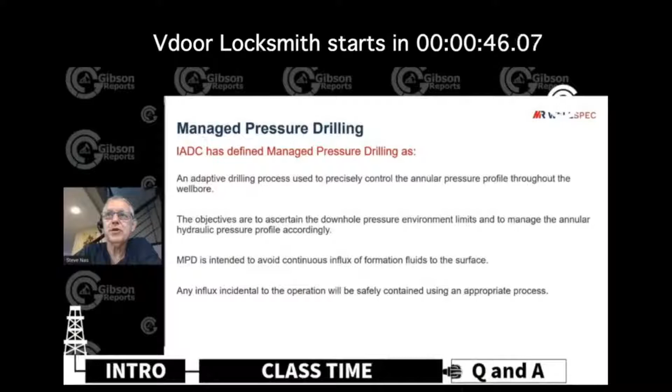So managed pressure drilling has been defined as a process to precisely control the pressure profile in the wellbore.

The key is being transparent with our clients in this case. So tell them what happened. If we had a failure, tell them exactly what happened, whether it's our fault or whatever the issue was, we need to be transparent. It's very important for everyone in the industry to know what's out there and what's happening downhole as well.

I've probably worked on over 40 different performance limiters in my career. If I miss any of those and the computer is raising weight on bit and I miss any of those, I have a train wreck. The computer's going in the ocean.

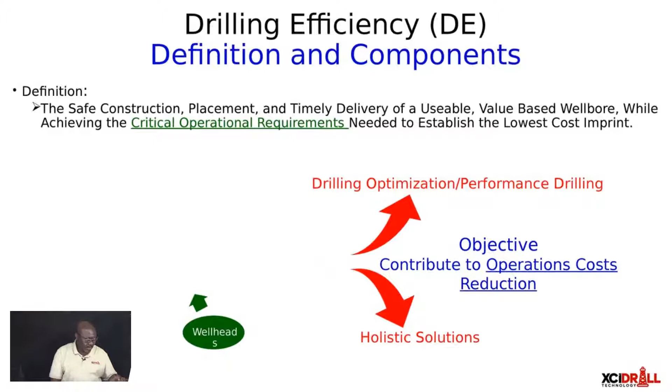So what is drilling optimization? There are several definitions. I really do not want to try to define what it is as seen by the industry today. There's no alignment, it means different things to different people, subjective opinions in conversations.

Pause real quick. Okay, I'm paused.

Okay, go ahead, we're good. Okay.

Some of the slides don't show the whole thing, they show missing parts. I don't know if the viewership sees everything. So in that regard, I'll get into it: there are several definitions, like I said earlier, and there's no consensus.

All subjective. But the key KPI is on ROP maximization, and also sometimes we talk about it as MSE minimization. But the question I would ask is this: ROP maximization and MSE minimization are the same thing, but we tend to talk about them like they are two different objectives for the project, when they are the same.

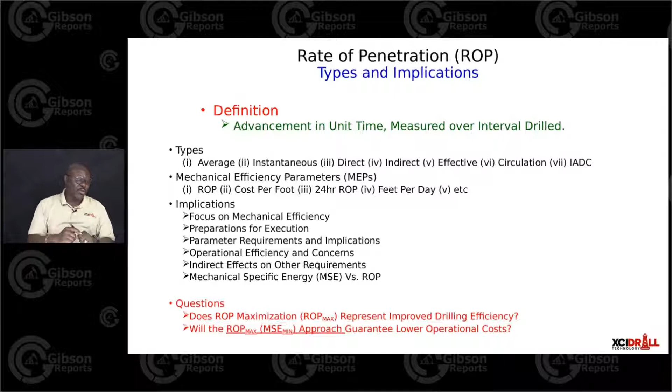So the question we need to ask ourselves: what is the intent of this effort? It's to reduce our operational cost. Therefore, does ROP maximization lead or guarantee a reduction in cost? That is the question that, regardless of how we execute, we need to answer at the end of the day.

You come to the other side of it, which is what I'm going to be talking about based on my time with Chris Special, which is the holistic solutions. And here we're defining that as a process for cycle time improvement, i.e. reduction and consistency, based on some execution principles and concerns, but based on the analysis of relevant data through a holistic or complete evaluation of the drilling process.

Now, there are some key terms that come up as well. And so what we need to realize is the key terms being that it's a process, it's talking about efficiency and reliability, it gets into applications assessment, and then holistic evaluations or complete evaluations, and then at the end is the analysis of relevant data.

So these elements come into this new definition that we are proposing, compared to what we do today as drilling optimization.

Now, if we are going to talk about cycle time improvement based on our execution of the holistic solutions approach, we cannot leave that in a vacuum. We have to define what a cycle time is. That cycle time is the cumulative time involved in the following phases: pick up the BHA, drill out, drill ahead, trip out, run the casing, and any trips you may have to do based on what happens in the drilling. So we add all that time, and that is our cycle time as we are defining it now for the holistic approach to improvement.

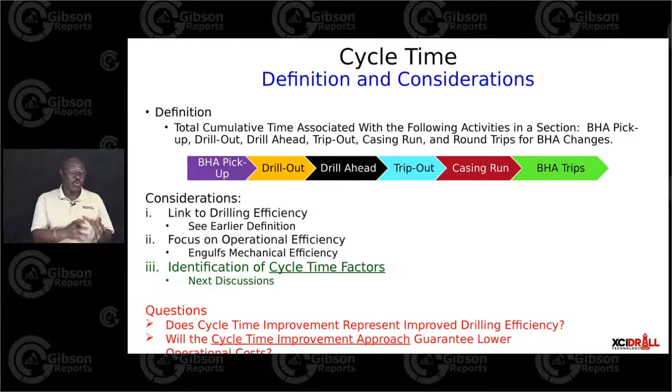And if that is the case, let's now look at it and show that we get that intent from that definition. We talked about holistic solutions, cycle time improvement, and the achievement of specific operational requirements when we defined drilling efficiency. Those requirements have to now be defined, so in talking to you we all know what we are talking about. The diagram you see is the cycle time factors, the operational considerations that must be achieved to reduce my cycle time.

Now, as you see, these elements are all known in the industry. We deal with them every day, but it's how we treat them and how we assess them. So basically, what we are saying today is that these elements we've always known are all related, and we cannot discuss them in isolation. I can't come to you and say, well, I'm doing well because I'm drilling fast, or because I'm drilling long, or because my torque is low or my vibrations are low.

No, those conversations in isolation we can't tolerate if we want to move ahead. We need to sit down and say, these are the elements. How do they affect my performance? Which ones are more critical? And how do I design my system and execute to achieve them?

The process of saying, let me go improve ROP, and if I get ROP improvement, then I'm going to go fix a new limiter or something to drill longer, that is way too old as a process, and it takes too much time. If we sit down and assess that system, we move faster because, as you can see, they're all related.

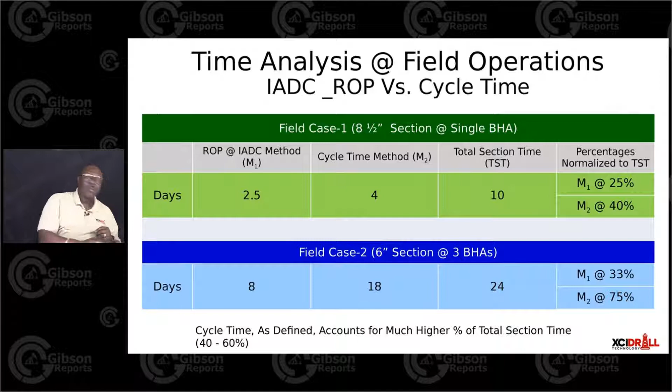I think I'm trying to move forward. There's no moving ahead. Which slide do you need to be on? The next one, 10? Yeah, there.

Then the next time, as they go through the second phase, also the same thing, then there's a need to improve. And then the conversation comes up: do we do the ROP maximization approach or will we do the cycle time approach? As a new process of learning, let's all learn to grow.

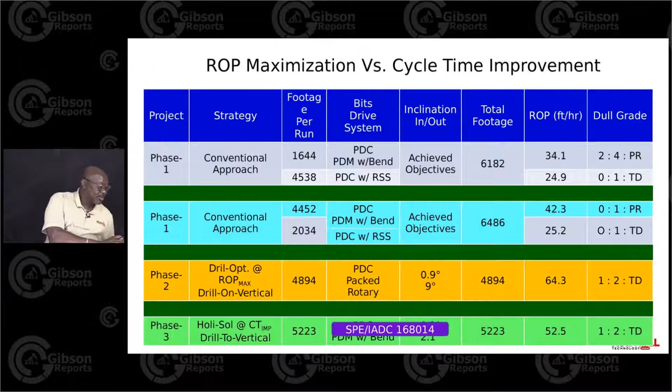Now here I'm just summarizing what it used to be. Remember the earlier diagram I showed of the elements that are all interrelated and linked, and that ROP was one of them?

And then the conditions we had were: one, the need to have a specialized bit to help us drill vertical in an area that was very difficult to hold verticality. Two, the BHA design: instead of the packed to push more weight to drill faster, we went to a pendulum, which we knew had to be run with less weight to stay vertical, to help us drill to vertical, because the pendulum allows you to make corrections through rotating events as against pushing hard on the packed.

That change, together with realizing that the bend size we use has a big effect on the durability and our vibrations as well, meant that if we want to do that and go pendulum, we also have to manage our bend size to make sure we can drill. The risk and RPM limitations based on the bend also came into the analysis.

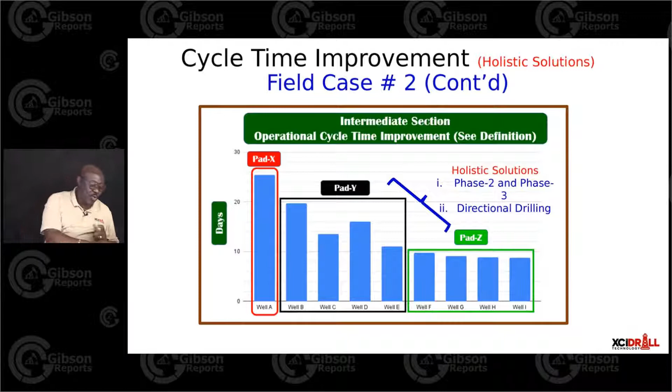I'm not in any way saying or claiming ROP is not important. Far from that. If a project requires me to increase ROP, knowing what effect that has on all the other things that need to be done or achieved, then we go for it. But I can't start a project with the intent to maximize the ROP without knowing how it relates to the other things that you saw in the earlier diagram. That should not be how we drive our performance and cost reduction.

And we know something else. Vibrations is an interpreted output. So we measure certain things around the parameters and we decide that, oh, we are vibrating and this is the mode of vibration back and forth. But because it's an interpretation, you will see that the same project, when we come to the vibration conversation, the modes could be defined or identified differently based on the tools you are using and which service company you're working with in their processes. So that is not an easier thing to do that quickly.

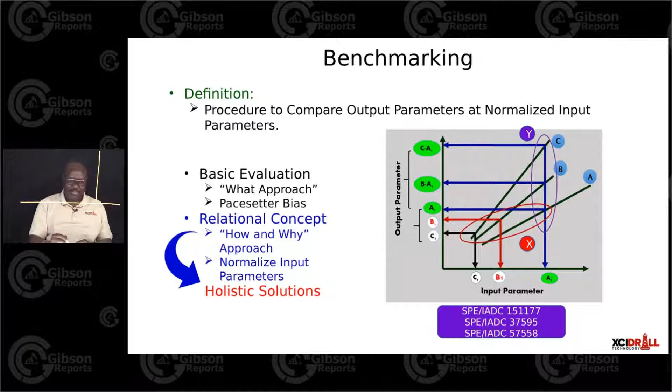Now, let's do something.

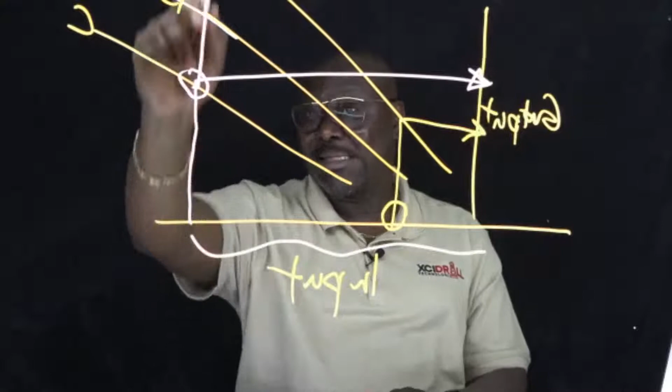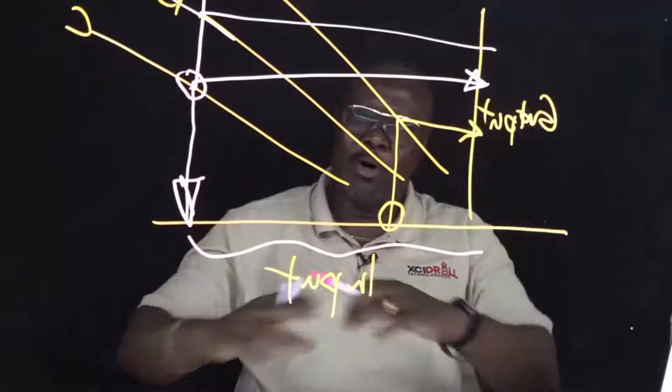What happens if I compare A, B, and C normalized conditions based on what C got? I come back and extend it to A and B. So if I give C $1,000 to go shopping, I better give B $1,000 to go shopping too. If I give you $1,000 and I give him $50, and he brought me one shoe while C brought me 10 shoes, I can't say C is the better shopper because he knows how to bargain at the store. No, it's because I gave him more money.

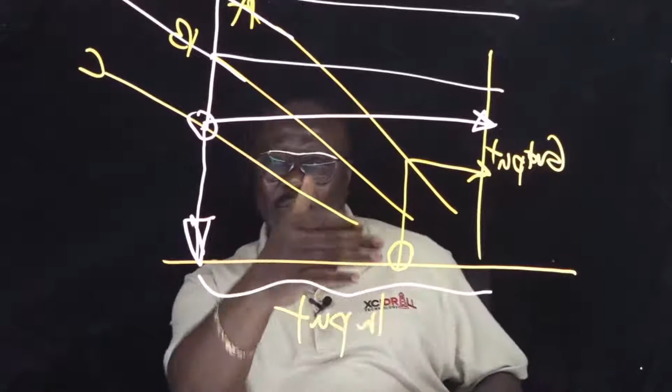Now I'm going to say something else. There are people who, when they begin using certain equations or processes, will tell you that when you want to use MSE to do your efficiency measurement, the first part of MSE, which is the weight over the area of the borehole, you should neglect because it's so small compared to the whole MSE output.

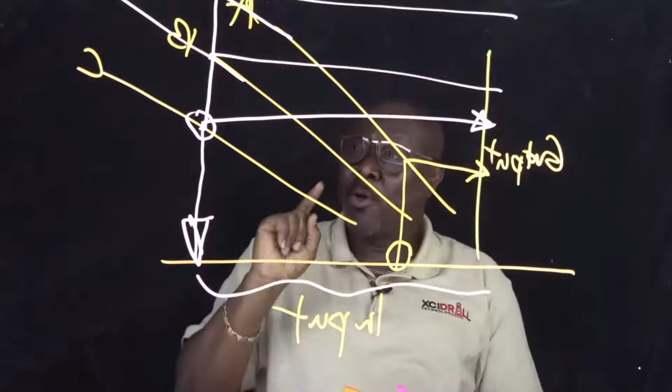Wait a minute. You're telling me to drive to Dallas. You give me a very big car that needs 80 gallons to get there, but you don't want to know how much gas I put in the car or how much money I'm giving you, yet you're going to judge me when I get to Dallas? That's not how it works. You have to look at every parameter that is in the drilling process.

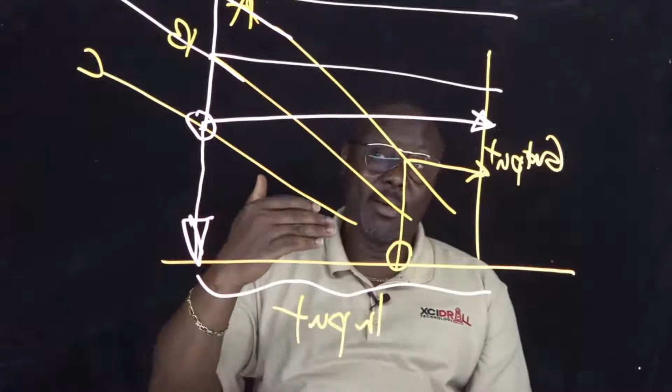That is why I started with input and parameters. You cannot neglect weight on bit, when weight on bit is what drives torque and ROP. You can't measure ROP and evaluate how good it is without needing to evaluate what drove the ROP. That process cannot be how we manage, benchmark, and evaluate. We have to look at them at the same input conditions.

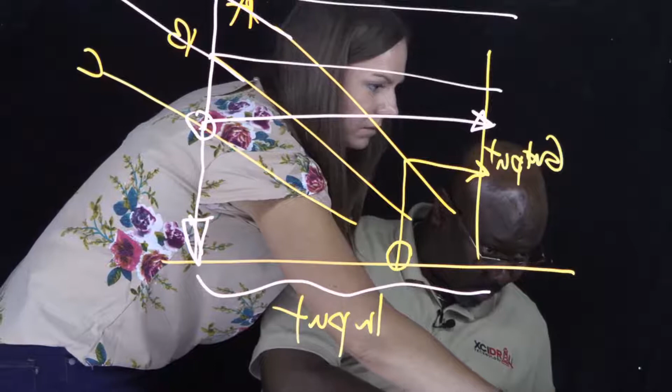All right, so now that we've shown how benchmarking has to be done by analyzing output parameters at normalized input conditions, let's look at certain conversations that I think are very critical before we move to the field requirements in performance.

In the planning stage, as per the new holistic process I'm talking about, looking at cycle time and the factors I listed earlier, we need to have a very good conversation on formation drillability, hole size, the physical versus functional aspects of what we do, and understand the similarities, differences, or relationships between failure, durability, and longevity.

Then we come to rock mechanics itself. There are so many elements that need to be understood, but for time, I'm going to pick on a few of them just to help establish what I'm talking about on the holistic side of the conversation.

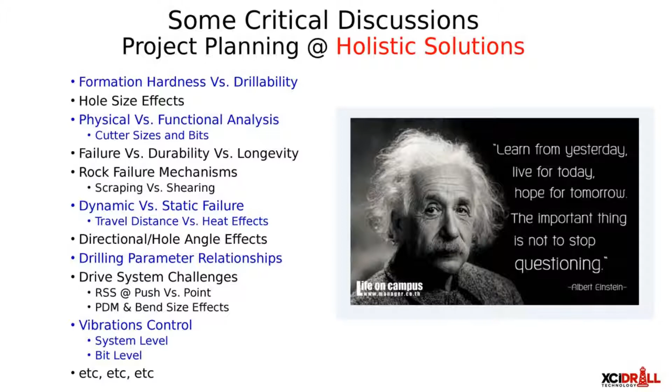Now let's look at the formation drillability aspects. We've been made to believe that the harder the rock, the slower you will drill, the more BHAs you will run, the lower your ROP, and so on. And that if the rock is softer in terms of strength, whether UCS or CCS, you should be drilling faster or longer. So you sit back and ask: when you compare the field observations to the claims and theories around this conversation, does it hold?

My experience says no. When I look at the rock effect, I come to a position I call formation drillability and its contribution to drilling difficulty. Drilling difficulty exposes how likely I am to succeed in my operation. In that context, if I have two sections of the same lithology, and one of them has hardness from 0 to 40,000 psi, and the other looks like this...

On average, we know it is lower than this one. This one here, A, is much more difficult to drill, more likely to cause failures, challenging with directional work and everything else compared to this one, B. But this realization then exposes us to a different conversation: that hardness is not as critical as the heterogeneity and how that contributes to the dynamic events around the drilling.

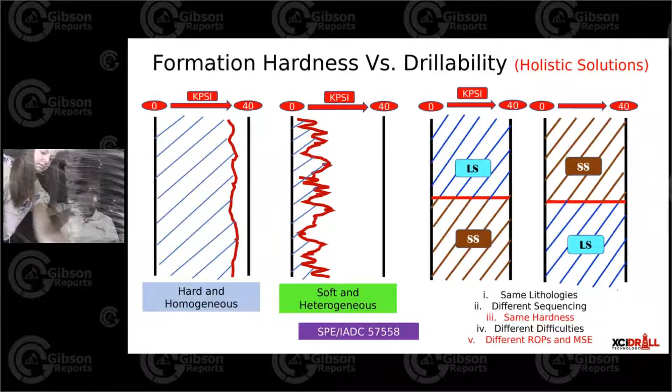Okay, so if I'm going to do something now. If I have two intervals to drill, and I have the same average hardness for the interval, same length H and same length H, and I have two lithologies, limestone and sandstone. So I have limestone here and sandstone there, same hardness, and now I have sandstone and limestone, same hardness, but the sequencing of the lithologies is different, though it's the same hardness. Let's say this one's hardness for the section is 30,000 psi, and this one here is also 30,000 for the two of them.

Our current position around drilling optimization today, and the claims we make about the difficulty of the drilling based on our hardness, pertains to what we say is 100% drilling efficiency -- what that rock strength should be when compared to our MSE, for example. Okay, these two should drill the same. The MSE should be the same if my bit and BHA is the same for the two of them. But you will see in the field that that's not the case.

When I have a section where the formation drillability of two different lithologies is the same, but their sequencing is different, I can do the same comparison for shale-limestone, limestone-shale, or combine them in any way. I just told you two for simplicity. The section where I drill limestone first and sandstone second, when the hardness is similar to the second option, drills better than when I have sandstone on top and limestone below -- not even close. Now, if the hardness is the same, but because of the sequencing in the lithology my ROP for the section will be different, then my MSE will also be different.

And if MSE is supposed to be equal at 100% efficiency to my rock strength, and the rock strength is the same, then the MSE should have been the same. But it is not. So how then do we relate the claim of 100% efficiency in value of my rock strength to the MSE? I'll leave that for another day's conversation, because David is going to tell me I'm running out of time here.

Where's my next slide? David, next slide.

So on the next conversation, after having talked about the importance of formation drillability in the holistic approach -- because in the holistic approach, I'm not looking at the hardness, I'm looking at the drillability and the difficulty of the section to make sure my system design, BHA, everything else comes into play for me to be more successful --

Now I'm going to talk about something else. In the past, especially when I used to look like Michael Jackson with an afro, we were told and learned that if I have two bits with two different cutter sizes, the bigger cutter compared to the smaller one gives better ROP. That's true. We are designing these bits now, and also, the fact that what we do to the bodies of the bits -- that claim is not true anymore.

So if I have two cutters of different sizes, there are conversations. If I do laboratory testing to verify the impact resistance of these two cutters in the lab, the bigger cutter needs more joules or more energy to fail than the smaller one. But if I took two bits to the field -- say a 6-bladed bit with 16mm cutters, and then a 6-bladed bit with 19mm cutters --

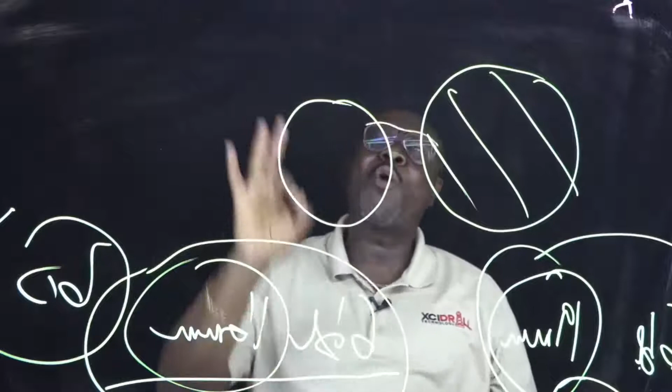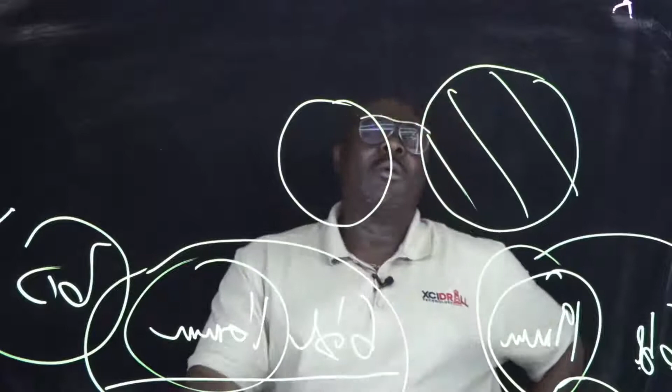Now, some people also will argue that a 19mm cutter was going to vibrate because it's 19mm. No, cutters don't vibrate because of the size of the cutter. The bits don't vibrate. It's not the size of the cutter that is making you vibrate. It is the design of the bit with that cutter that is making you vibrate.

So again, the observation is there. If I run this bit and then I run that bit in the field, my torque is higher here than here. Now, we tend to associate higher torque with vibrations. Vibration is more dependent on the behavior of the torque, not on the magnitude. So, but then I'm not going to claim that if it's higher in magnitude, the susceptibility to vibration is not there. It is there, but it is within my means to control.

If I understand the design, and I'm going to touch on that very briefly because David is already waving, but look at this slide. Okay, let's go back to this slide. I'm showing you 3 comparisons of bits.

This here, the one you see bottom left, it's a 7-bladed bit, 16mm cutters, against a 9-bladed bit with 16mm cutters. The 9-bladed bit with 16mm cutters is faster, is more durable, and drilled longer than the one with 7 blades. So all the things that at least we will say we can accept, that physically the 7 will be faster, but the 9 will be slower.

That is not true. Now you go to the one on the top. I have an 8-bladed bit with a 6-bladed bit. And again, the same conversation: the one on the left, which is 8, faster, more stable, more durable. Then you come to the one on the bottom, and that's where it really gets exciting.

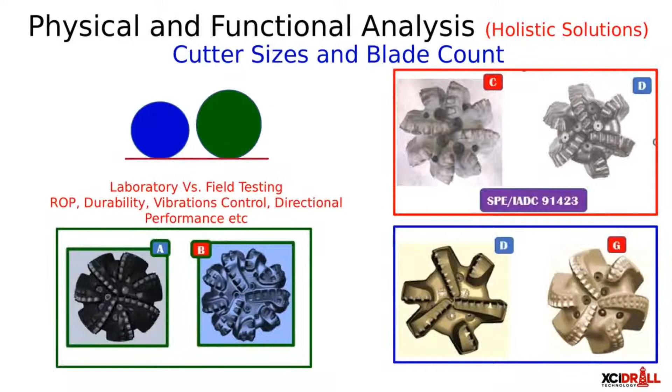Okay, so let me now, what's the next slide? Okay, go back. Okay, now I'm going to get into a subject here.

I'm referencing the paper from which this comes. Three bits were tested in the lab. The first bit has 8 blades with 13 millimeter cutters and lower back rake. The second has 9 blades with 13 and 16 millimeter cutters, 13 and 9 millimeter cutters. The third has 8 blades with 13, 9, and 11 millimeter cutters.

Now, the bit with bigger cutters all average throughout, which is the X bit, is the slowest. So a bit with bigger cutters throughout and lower back rake in the lab is slower than the two that have smaller cutters and more blades.

So conversations around this don't hold anymore, because we are doing so many exotic things to these products that those claims don't hold. But why is this diagram important? As you look at the 3 bits and the ROP response to weight, by the way, RPM is constant in these evaluations.

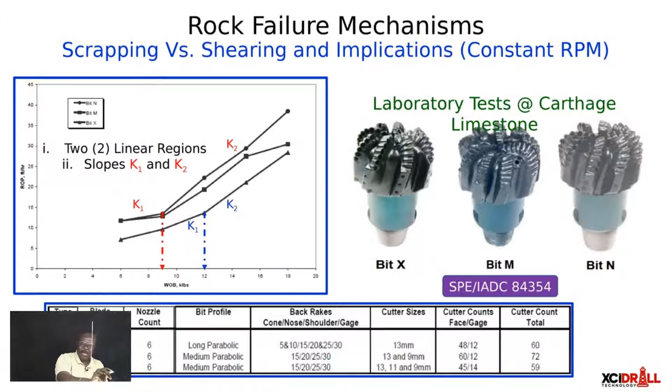So is the nozzle count, the TFA, and the flow rate. All those things are kept constant. The only difference is the weight, and we're measuring the ROP. Now, if you look at those diagrams very carefully, those lines very carefully, you see lines that look like this.

That line that looks like that defines the two rock failure mechanisms of the bit. And it's very critical for our ensuing conversations for us to know what I'm going to be touching on here.

So if RPM is constant, so is flow rate, TFA, everything is constant, and I have my weight on bit here, and I'm measuring ROP here. As I do a drill-off test or apply parameters, I see an ROP increase anytime the weight on bit goes up. It gets to a point where the same finite increase in weight on bit gives me a non-proportional or exaggerated increase in ROP.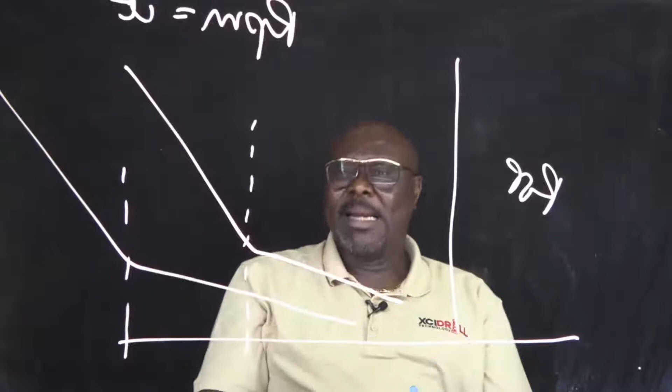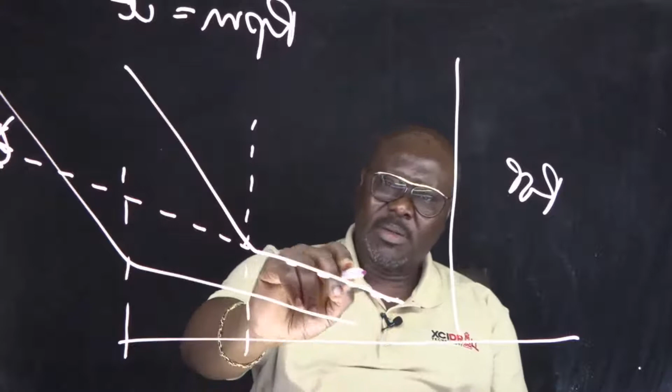That depth, or that value of weight, at which I see the deviation from my trend, because normally the trend starting from here should have gone like that, but it doesn't. It's a no-no, it changes there. So I will characterize this condition as scraping of the formation, and then shearing of the formation.

These two conditions are so critical and needed for us to understand as we move forward, especially in the field. So anytime you see this, I'm going to show a different diagram where I differentiate that. What am I seeing here? If this was bit X and this is bit Y, bit X is taking much more weight, WX, to transition from scraping to shearing.

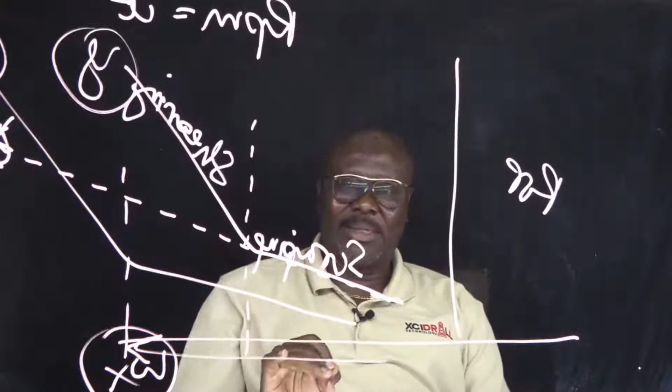So what is the difference between the two, and why is that important? Why do I care about this transition? I care because the heat the cutters see on the bit changes based on that transition. If I stay in this zone longer, it doesn't matter how many cutters or blades I have on the bit, I'll build up more heat and wear it faster.

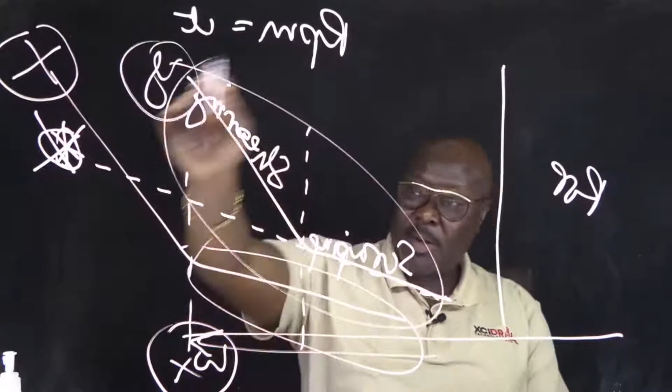If I transition to shear quicker, like this one is doing, let's say I'm running these two bits at this weight here, and this weight here. This one is giving me this ROP, and this one is giving me this ROP here.

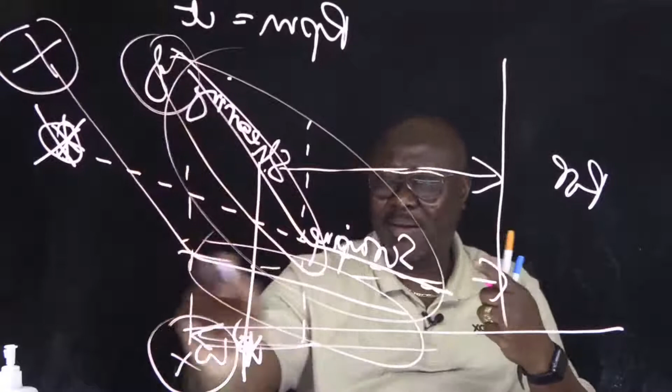The significance of the mechanism of failure is much more important than the ROP, because in addition to this ROP being higher, it is building up much less heat in the bit, and therefore less likely to start to wear compared to this one, which is drilling slower and wearing, and also building up heat.

What does this mean? Sometimes in optimization we'll pull a bit, and the bit is worn, maybe 2, 3, 2, 4, whatever it is, and we say, oh, let's go get a more durable bit. What does that mean? A more durable bit means finding one with smaller cutters and more blades, increasing the number of cutters. What have we just done? We've just forced the bit that was scraping to now guarantee it's going to be scraping more and longer.

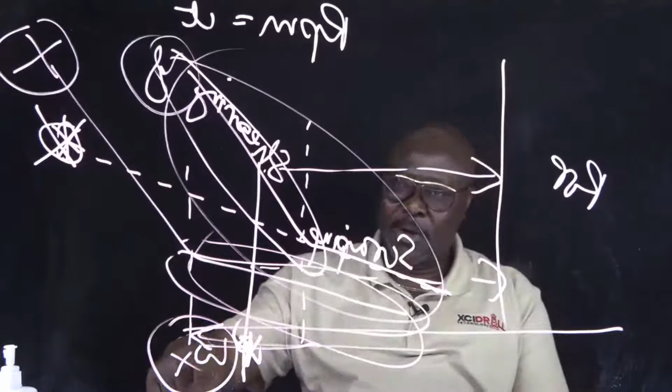It's like going to the kitchen and finding out the knife you're using to cut your tomatoes is blunt, you cannot cut. And you say, wait a minute, let me put more force to cut a tomato, but in doing that, let me get a blunter knife. That's what we're doing. In the holistic approach to solutions, we don't do it like that. So with this conversation, let me now transition to a more critical implication. David, give me the next slide.

Now, this slide here, okay, all right. Okay. Okay, so I have yeah. Okay. Oh, I like this color.

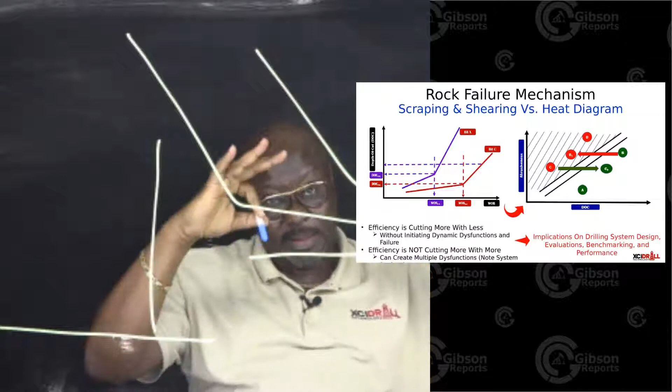So if RPM is constant, and my flow rate and everything else is constant, then I can equate my ROP to my depth of cut, if RPM, flow rate and HSI are all constant. Otherwise, the two of them are so different in how we should understand and interpret them. But because I kept that constant, I'm going to make that conversion in the discussion.

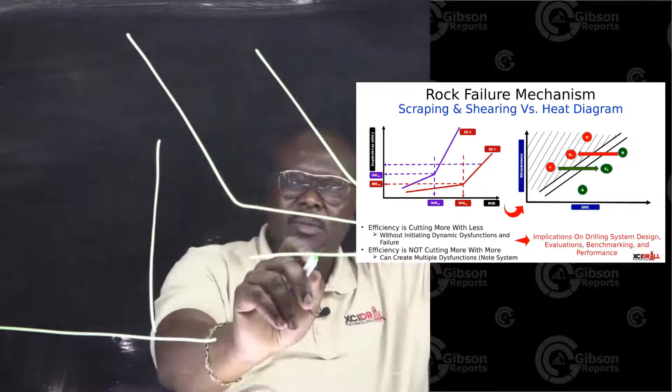So the ROP I was getting, based on these conditions here, I'm now going to bring into my heat diagram. We know that heat we build in a bit is a function of the friction we create whilst drilling, which is also dependent on my depth of cut, which now I'm going to be equating to friction from the rock, the abrasiveness of the rock, then my depth of cut, which I'm going to be equating to my ROP because my RPM is the same, and then the time I stay in the hole.

That's what I'm building up on the heat. And I can add other things like RPM and all that stuff, but those drivers contribute, they don't dictate as much as these three elements I've talked about here.

Now, there's a paper written by Allen Sinor. Allen Sinor wrote a Bible to me, SPE 39306. This conversation that I'm having, especially here, Allen Sinor described all this years back, about 25 years ago. And the concepts have not changed. We have just neglected his teachings.

So let's go back to my heat diagram. Now, I'm going to plot, look at this line here. Okay, so anytime... David, can you go on the screen? Make it bigger for me?

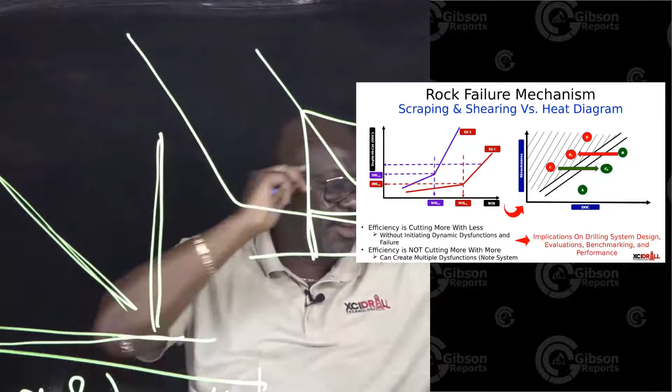Yeah, okay, so anytime we are on this part of the diagram, anytime we are here, we are going to wear the bit. Anytime we are here, we don't wear the bit, we don't build heat. This is a heat diagram. So we want - and we have abrasiveness on this side and my depth of cut on this side.

Okay, so we want to stay here. We want to stay in this, we want to stay here. Now, what I'm saying has been tested and proven in the lab over and over and in the field. It's not anything new, it's just the application of these principles through the physics to the field. But it's been proven. I want to stay here, I want to stay here, and I don't want to be here.

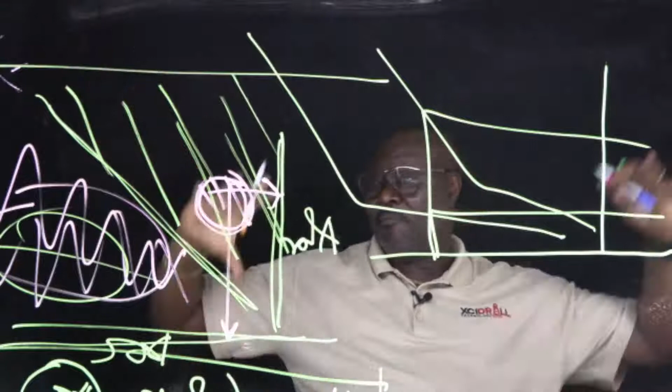What does that mean? If I want to minimize my wear, let's say I have a bit here that is wearing because of the abrasiveness of the rock and my depth of cut, which is low, I'm in this region, I'm going to wear. So it doesn't matter - if you want to improve your ROP, sustain it longer and drill longer, you don't put a very heavy set, with tons and tons like a tank, because then you are going to reduce your depth of cut, and if the rock gives you any abrasiveness, you are going to entertain the wear.

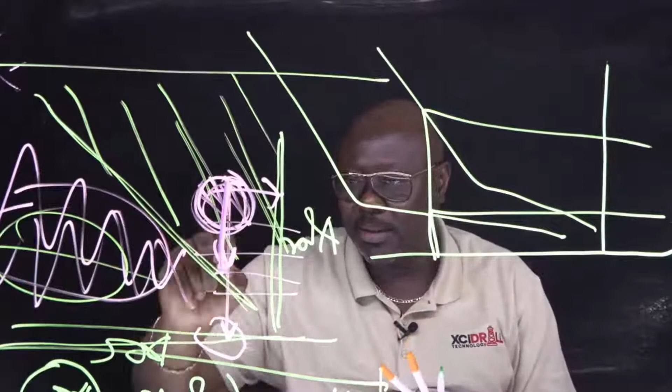And as we know, wear begets wear. As you start to wear, the minimal wear grows into bigger wear, and very fast. So if I am here and I want to improve durability and drill longer, faster, I cannot change the rock, which means I cannot come down in this conversation. I cannot come down here because the rock is the rock. The Travis Peak, the Plover, the Huamampampa does not change.

But if I'm here and I want to drill longer and faster, I can go horizontal and come here, because if I come here, I'm falling below my heat diagram. And how do I do that? This one here, my depth of cut. Now, does the depth of cut alone do that? Come back to this diagram. No.

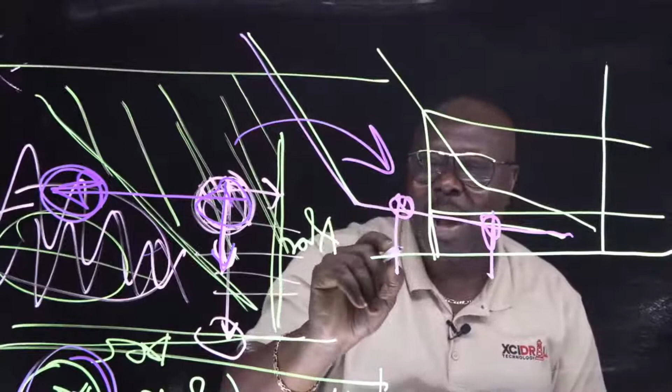Because when I'm scraping the rock and I increase my weight from here to there, I'm still seeing an improvement in my depth of cut or ROP. I've seen it. But have I changed the rock failure mechanism of the scrape and the shear? No, because the gain in the depth of cut resulting from my weight on bit increase did not change my slope. If I don't come here, it doesn't matter how much weight I'm putting, I'm still going to wear. I need to come here and minimize or reduce the heat I'm building up in the cutter and in the bit. So, Tracy, can you help me?

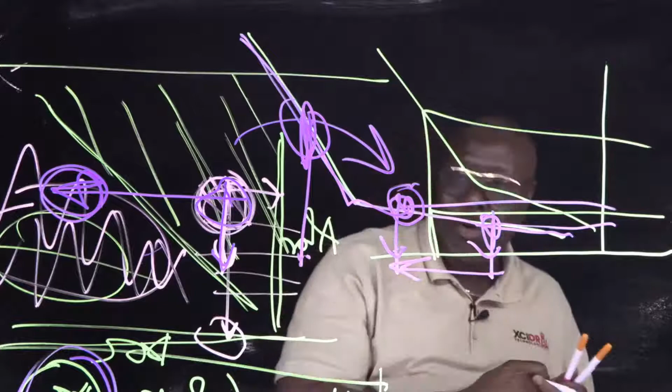And David, give me next slide, please. Now, this conversation that I've built up was leading to this point.

So if I increase weight and I'm drilling faster, because there was a time when we were so scared of increasing weight, thinking that if we increase weight, we're going to break something, the bit impact. But then we've seen that increasing the weight does not really lead to that. But then there's still some skepticism around doing that. So the issue, as I've just pointed out, is not the weight increase. It's the depth of cut change and the transition from the scraping to the shearing. That is what is driving the mechanism.

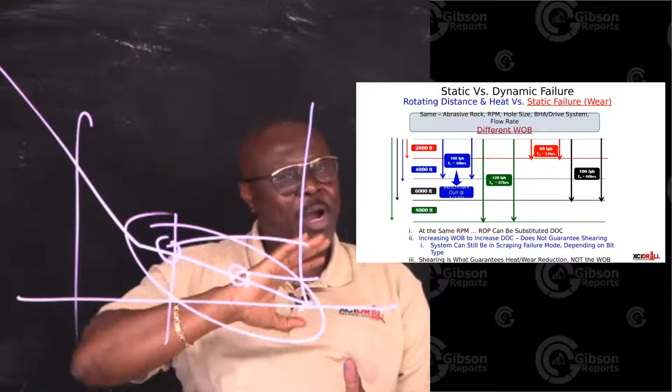Now, let me pause for a moment. We are talking about depth of cut, and I'm using the weight conversation, but you can tell me, Graham, you're on the wrong path, and you are right, because there's another way of doing that. If I also had a bit in a BHA where that bit didn't need that much weight to shear, let me draw one more line so you see what I'm getting at.

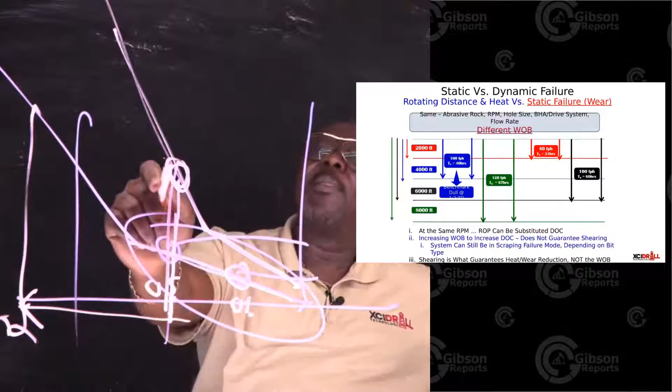If I had a bit that did this, where at that same weight that I went from 10,000 to say 30, and I'm still scraping. But if I had a different system where at the 10 to 30 is now in shear, I solve the problem. So sometimes you want to increase that weight to 60 to transition, but you can do it the other way around. Find something different, analyze it, divide all the mechanical input, and then you run and you get into shearing.

This conversation is so critical. We don't wear because we drill long. We are wearing because we are not changing the failure mechanism that the bit is giving to the rock. We are staying in shear, in scraping, and that's what is happening. It's not how long we've drilled.

There are offsets where you run something, drill longer, and it comes out green, and people say maybe not. I've had people tell me, well, I think the rock was different, it was softer. No, it was not, because I applied a holistic interpretation of the application, and that's what led to that. It's not because the rock changed.

I remember one time, anyway, I don't want to talk about digressions, but David, give me next slide.

We need to make sure we are analyzing what could possibly be causing our vibrations holistically. On this slide, I have all the conditions and factors that could create vibrations: the BHA, the drive system, whether it's a push or point, because those two have different dominant vibration modes.

The conversation that because the pipe or string is in constant rotation and therefore not sliding, and therefore not vibrating, is not true. The two contribute to the vibrations.

It's been proven the formation characteristics, as I showed earlier, the hole size, the parameters we run, and the bit we've chosen can contribute to that. If there's a reamer in the hole, all these elements contribute and should be analyzed as per conditional application. Now, give me next slide.

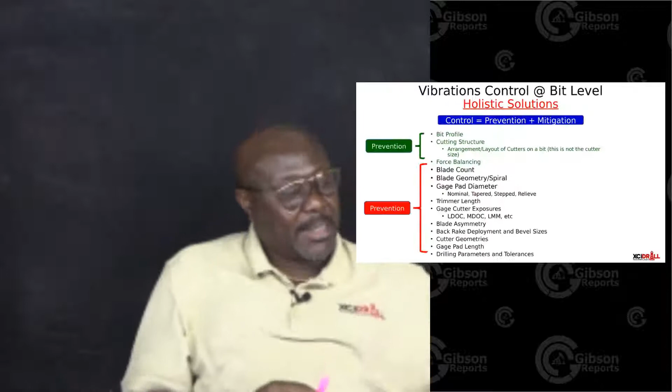So here, if you look at the list I've given, I'm going to pick on what we all subscribe to being the culprit. There's a problem, we point to him. Hey, that went bad - oh, Graham is at fault.

That went bad. David, today I've not picked on you. I'm coming, don't go too far.

So basically, you have the vibrations. So the bit, when it's picked from the list of factors that could contribute at the system level, then I come to the bit's contribution to the vibration and the elements around the bit that can drive that. So I look at vibrations from two aspects of control.

How can we prevent and or mitigate. So what aspects about the bit do I care about more? I don't need to mitigate something that is not there. So in my pursuit, I want to say, okay, I want to prevent. And so what around the bit helps me prevent vibrations.

Profile of the bit is critical in the prevention side. The cutting structure of the bit - this is not the cutter size, it's the cutting structure. It's how the cutters are designed and laid out to achieve specific objectives. That is critical.

Then the last one is the force balance on the bit - how you balance it. Very, very critical. There's so much evidence on this regarding the dynamic behavior of bits, but today we don't even do it. It's like it's gone, it's a lost art. I remember when Martin Fear was at BP in Colombia, you had to balance and explain this, and he was measuring all that stuff. The papers are written, it's all there.

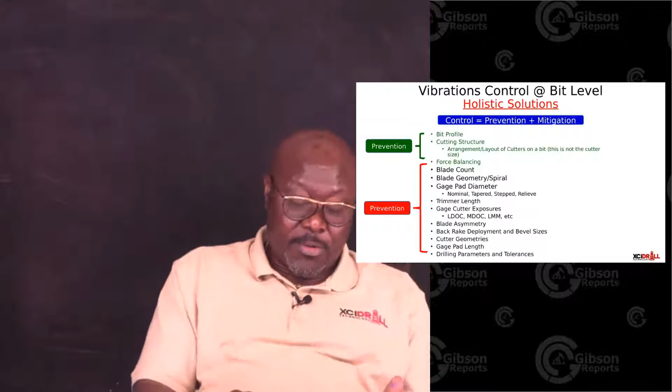Okay, I'm talking about myself now because I've been told by the doctor to lose weight. So if I'm not doing what is required, then I want to do the mitigative side, which is what? Taking medicine. We all know the implications of medicines, but the best medicine is for me to lose weight. So anytime you engage in mitigative aspects of control, it comes at an expense. If you want to put some features on a bit to try and minimize or do something, it's not free. But if you can solve the problem on the preventive side, you're not losing anything.

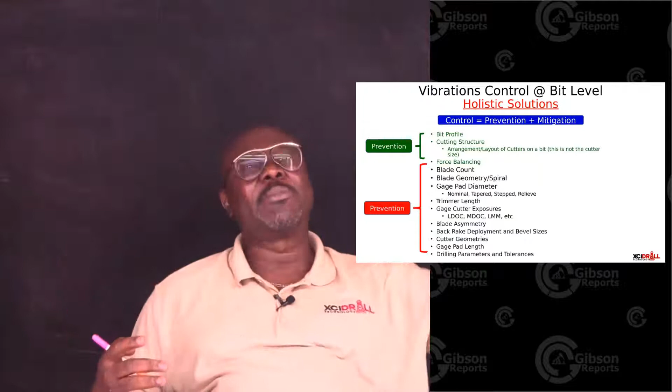So I'm a strong believer in understanding the profile, the cutting structure, and the balancing. If I do this right, I use 20% of what I have to do next for mitigation, not the other way around, where I'm doing something and then adding a lot of mitigative aspects because I'm trying to control my vibration. What I want to show is the level of things that go into how a bit can contribute to the vibrations we see. Next slide, David.

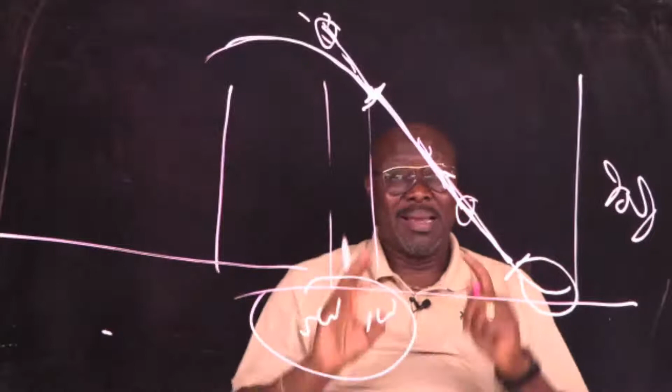The holistic approach does not subscribe to this position. First, if I go to the field, what I see on the relationship between weight and ROP is very different from what this is saying. And by the way, clear distinction: when I draw this and have two slopes, that is not the same as this.

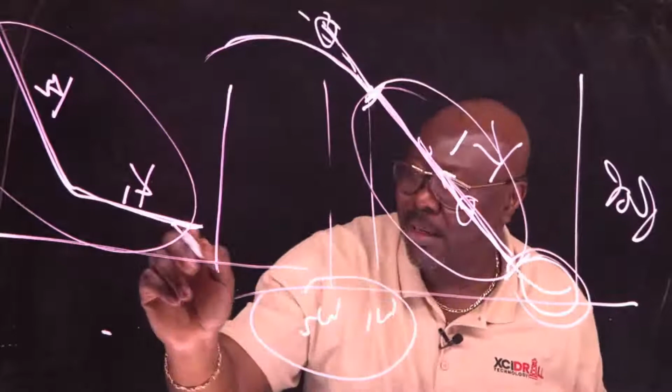This region of a constant slope, K1, is what I'm talking about, and in the holistic interpretation of the development, it's got two slopes. So this region has one slope, this has two - K1 and K2. So this one here is still here, I don't care for that one. When I'm tagging bottom or spotting, that's not what I'm talking about. I'm talking about this here, which is 2 compared to 1.

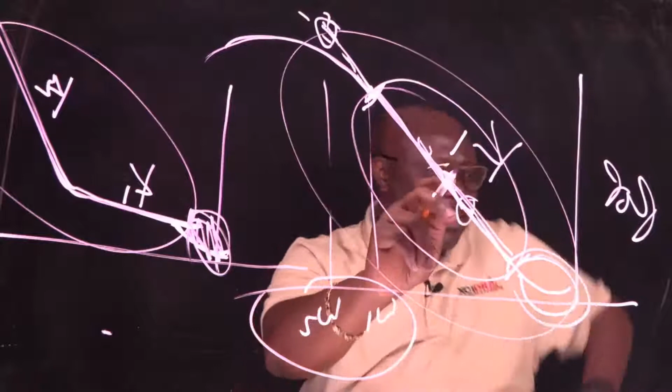And this conversation has lots and lots of implications. The biggest one today is what this discussion makes us assume in the field. Why is that needed? That single slope is needed because of the claim that if we're 100% efficient, MSE is constant, and then ROP is the best you can be in the sweet spot. Okay, that requires this slope to be constant.

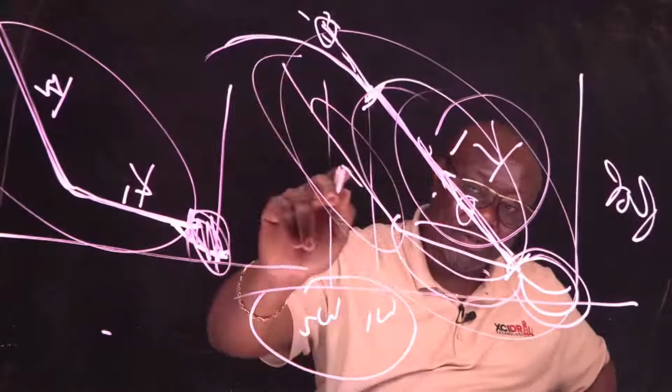That slope in this region, you have 2 like that - you have the scrape and the shear, and there's 2 different slopes, and I want to be here. That is not the same as what we are talking about here. Very different conversation. So David, can you bring my slides up and blow it up?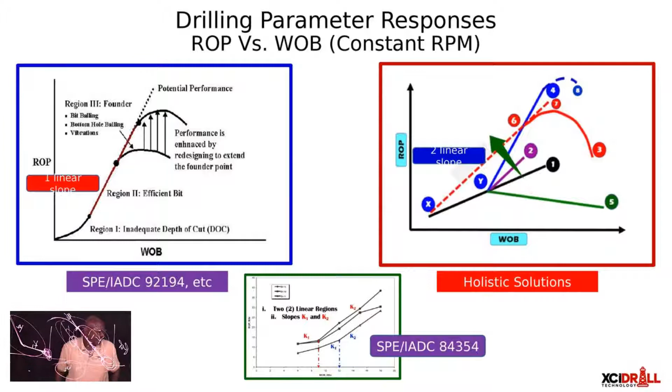When we base our conversations on that earlier slide, it makes us believe that if ROP goes down, I need to put more weight. If I see torque fluctuation, it's stick slip. That conversation is driving most of what we do today. But let's draw back, look at the data and not average them. Look at the zones of drilling, what is happening, and then you begin to see trends that are very different in that data. Because the path to improvement is in knowing - it's not just being aware of the problem, but knowing what is causing it and the why and the hows that happens. David, next slide.

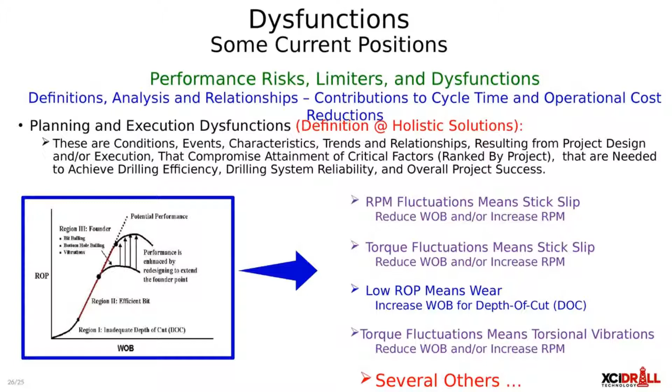So going back to what I said earlier, you have to recognize what is happening. And what I want to say is this: when you recognize or know that you are sick, it does not mean that you know what sickness you have.

What does that mean? I can tell when I'm vibrating, but that doesn't mean I know what I have. Or I can tell when my ROP is not responding the way it should, but I cannot tell what is causing it until I go back and look at a new process I'm going to describe, which I call the AIVReC.

AIVReC. It's a 5-step process to the identification and remediation of dysfunctions in real time. A stands for awareness, I for identification, V for validation, RE for the remediation, and C for the confirmation. I do not want to jump from awareness to remediation.

I don't want to do that. I don't want to see RPM fluctuate, torque fluctuate, or ROP go down and say, I know what it is, boom, let's do that. No, I want to be able to understand what it is, what is causing it, validate that, and then act. There's a way where all the dysfunctions you see can be defined to go through this process. Now somebody is going to say, Graham, this is a long process.

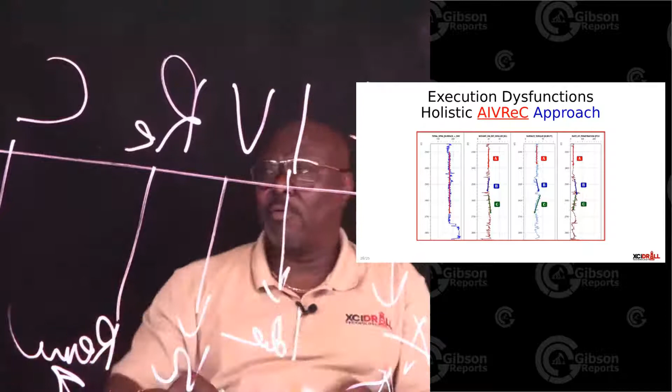So let's not become aware and then jump to remediation. You become aware, you identify, you validate. So let me draw one quick example here.

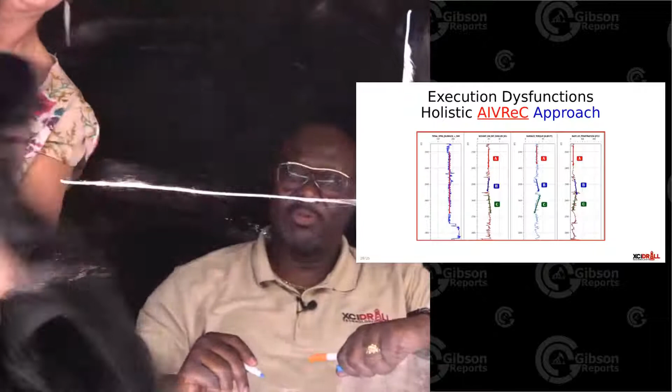So if I look at data and I see my ROP versus weight on bit, I see this is not the same as this. This is different, but I can see this, which tells me that as I increase the weight, ROP is going up. I can't validate that I'm in the ductile shear mode because I don't see the change in the slope from K1 to K2.

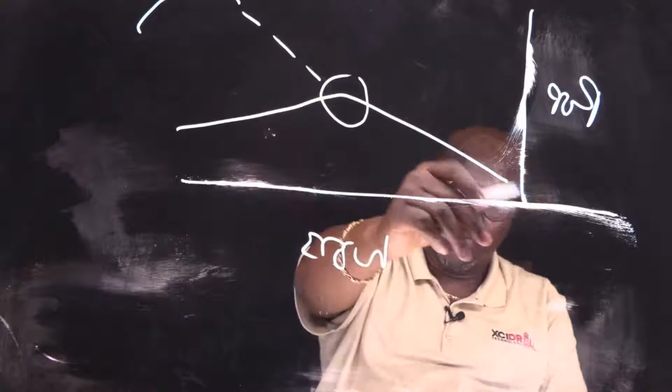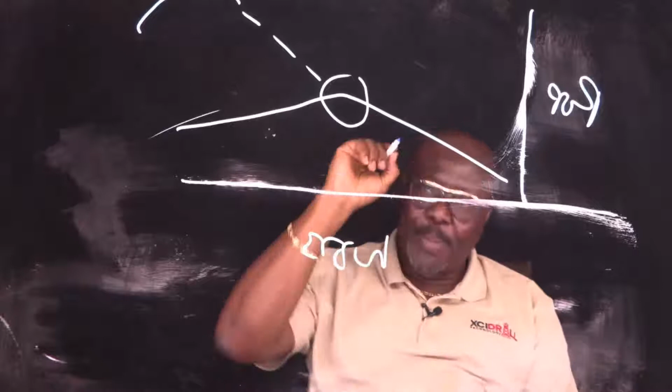But what I can confirm is that it is coming down. Now that is an awareness of a trend. I need to identify all the things that could have caused it. And then I need a way of testing to eliminate possibilities, by the Kepner-Tregoe process or something, saying if A then B, if B then C. I need to do that before I can say this trend I'm seeing is caused by this, because this is what I did to fix it, and it worked, and therefore I knew what it was.

Without that process, somebody reacting will say, oh, the ROP is low, increase the weight. But if you increase the weight, it's going to be worse. This is the challenge we have, and I think we can all work together, engage, discuss, and make ourselves better. So let's go to the next slide, David.

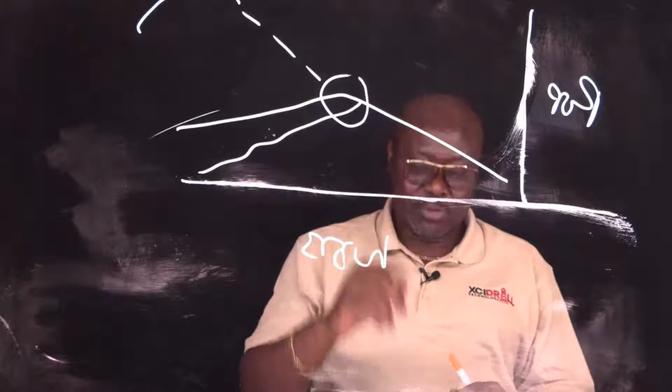This is the recent run where—no, go back, the one before this one, okay. And give me full blast.

Okay, so here I'm showing some parameters. The left one is the RPM, total RPM. The next one is weight. All right, so I have those parameter trends.

Now, it became very obvious right from the beginning of the run that our ROP was lower than expectation. We've drilled several wells in this area recently, and we started out around 120 feet an hour at the same weight, so it wasn't unknown. We knew there was something wrong. We started trying to go through the process of identifying it, back and forth, and nothing was working. So you go into the data and begin to look at the trends. If I average the data, I will never see what is happening.

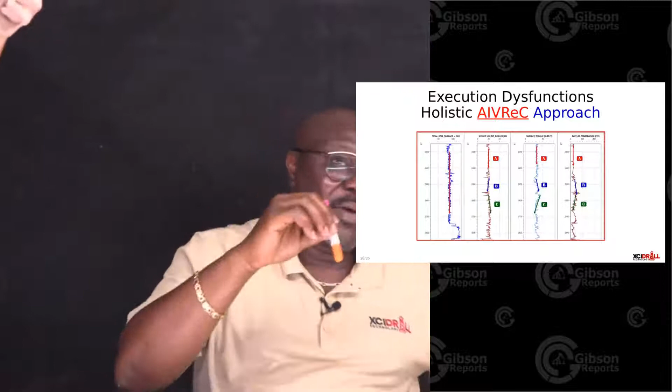If I go back and apply the trends I showed you in the weight response back and forth, the issue becomes very clear, because every dysfunction has a definition, and it's not just a definition. We also have parameter trends that help you identify it. It's not what some computer model is saying.

When you work with the guys in the field and I'm looking at the real-time data, you can see it. So David, blast me up with a full slide on that one. So you're looking at this data, you see certain trends, and the trend is matching the one I talked about earlier.

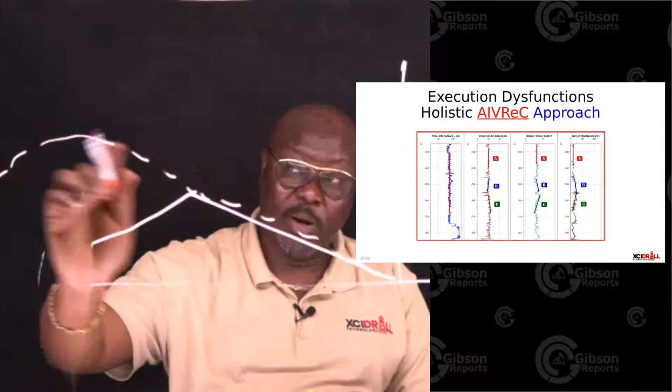Okay, so basically when we back off the weight, in the beginning the question was, is it this, where I'm increasing the weight that I'm balling? But if I was balling, I will see it—it could be this or it could be that. Sometimes these two in their readout in the data become very, very close in the interpretation.

That's why I made a comment earlier that when you validate, there are ways to cross-check. This could be caused from weight hanging up, it could be caused from the bit, it could be caused by balling, it could be caused by bit wearing. So many things could cause that, but I'm not going to jump to the conclusion until I check it.

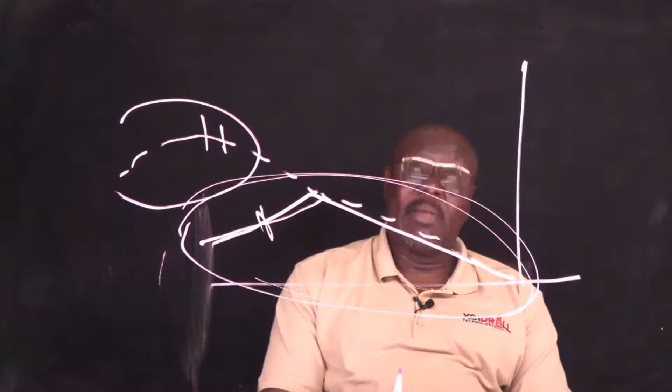So the very first thing is, if you are balling, the question is, did we know we're in a zone that could cause us to ball? Because we've drilled about 8 wells and we've never seen this ROP be that bad at that weight. Now, it could also be caused by formation change—hey, we're in a different formation that we didn't know, and all of a sudden it's causing that. So that conversation comes up.

So in a way, knowing that trend, you go through your definitions: if I'm wearing this, if I'm balling this, if I'm hanging up this, if the formation changes this—you do all those tests. So then we go to the next slide.

So, awareness: low ROP compared to offset, 30% of expectation in the ROP. We should have been doing about 120 to 150, we're doing 30, 40-ish, 50-ish. Identification: possible causes must be defined for analysis.

Formation change, or PDM failure—it could have been a PDM failure at the start of the run. Then the validation: we went through checking everything after the run, because during the run we couldn't see what happened. So after the run, going back to the geologist and saying, 'Could you help me here? I think that we balled up.' He said, 'Oh yeah, we went through a clay zone that we've never seen before.' And I said, so why wasn't that risk identified or thought about earlier? But that was what happened.

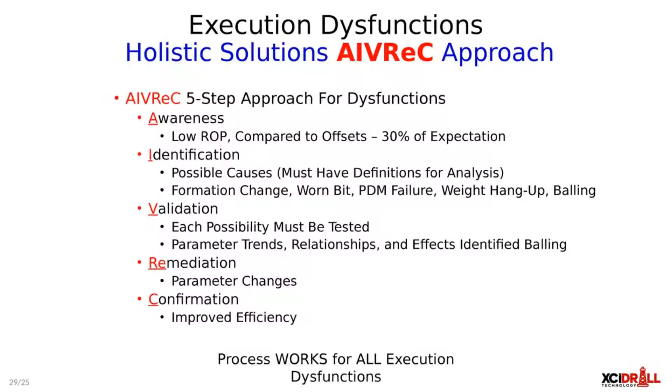So in a way, it wasn't wear—because the bit had just drilled out and started to drill ahead. We had drilled less than 200 feet, so there's no way the bit could have been worn. That's how you eliminate the trend. Also, if it was wearing and we backed off weight, the ROP goes down more as a result if you are wearing. So you check the validation process: if I'm wearing and I increase the weight, ROP will go up minimally or stay flat, but if I drop the weight, it goes down more if I'm wearing.

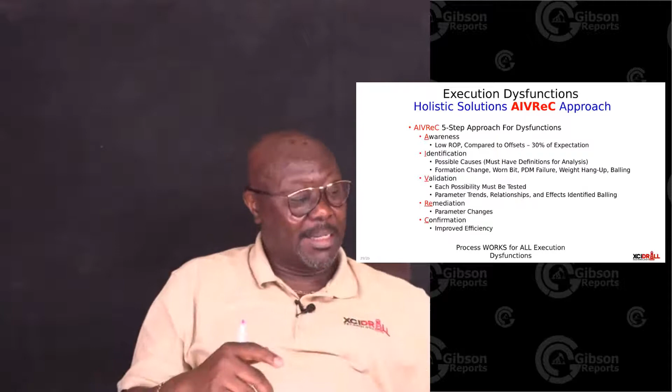So all these checks were in the data, and in the end the guys found that out, went back in the hole—not on that same section, on the next one—and it was different because we went back in with a different bit since we didn't know what it was. But in the end, the confirmation was that we'd gone through a zone we had never seen before. Because if we had known, the preparations for that would have been a little bit different from the holistic standpoint.

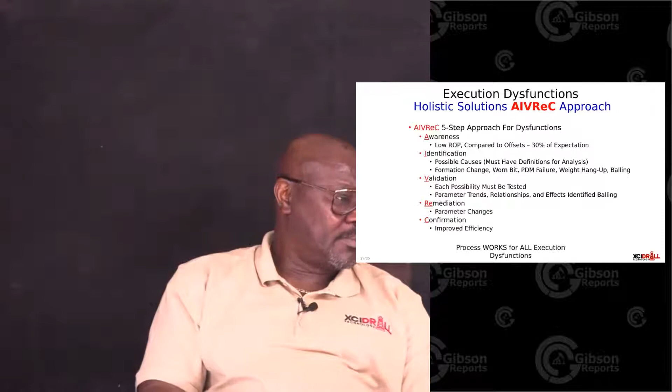In conclusion, I'm not going to read it all so we can have time for questions, but it's saying that the holistic approach to reducing operational costs is more effective than just trying to maximize ROP every time. ROP is a condition, one of the factors for cycle time reduction. It's not the dominant factor. It depends on the project.

At the same time, benchmarking must always normalize input parameters to see what is happening. Then you come to the fact that certain aspects as to the physics around the things we do, how we wear, the effect of features and stuff needs to be understood from a holistic standpoint.

BHA design is very, very critical to all these conversations. Sometimes you can make the BHA do stuff for you, and not always think of a BHA that allows us to pack more weight. We shouldn't be driven by the passion to pack more weight to drill faster. We can drill faster by being more efficient, and efficient means doing more with less.